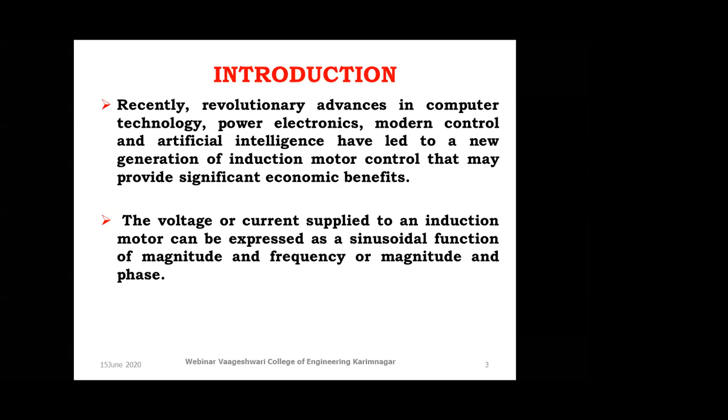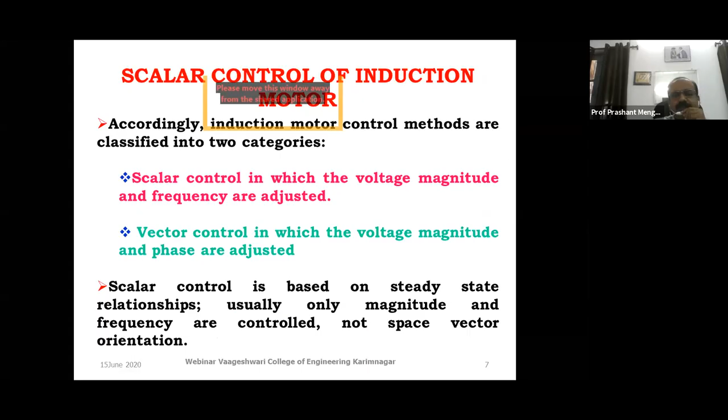So according to the induction motor control method, there are two categories. One is scalar control, in which the voltage magnitude and frequency are adjusted. Another is vector control, in which the voltage magnitude and phase are adjusted. Scalar control is based on the steady state relationship between voltage and frequency, and we are not controlling any space oriented vector controls.

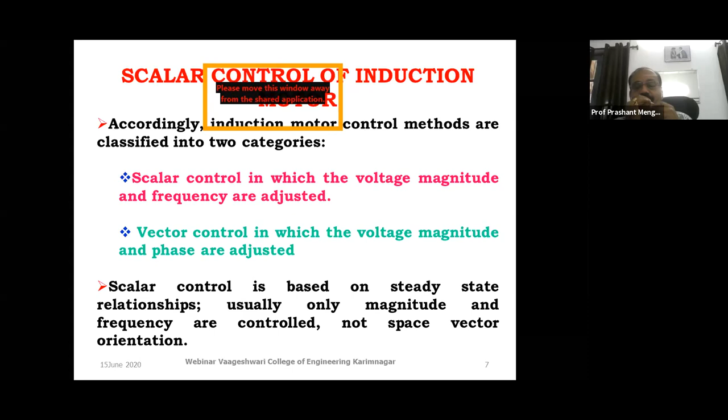Scalar control can generally be used in the open loop mode, whereas vector control is expensive and a high performance drive which aims to control the magnitude as well as phase of the voltage and current. As you are aware, cost economics is very important as far as induction motor drives are concerned.

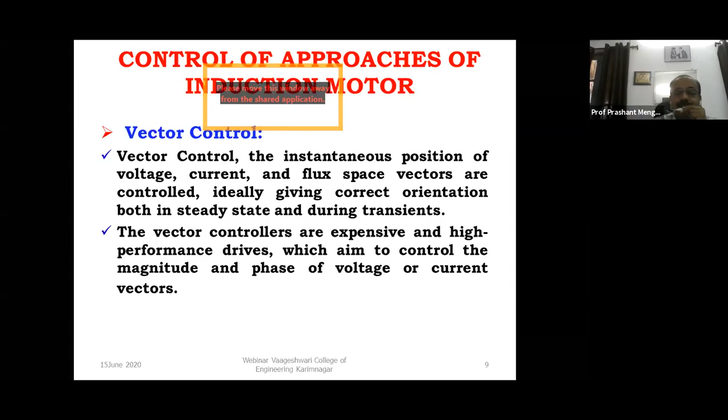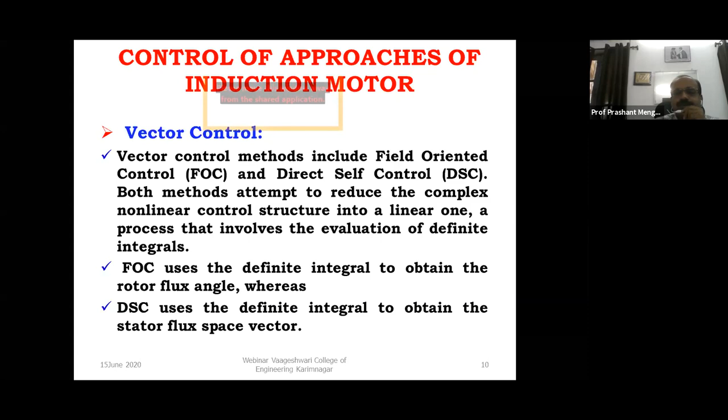So the vector control method includes field oriented control and direct self control. Both methods try to reduce the complex nonlinear control structure into a linear one, and the process involves evaluation of definite integrals. FOC, field oriented control, uses the definite integral to obtain the rotor flux angle, whereas DSC uses the definite integral to obtain the stator flux vectors.

Vector control has been successfully used in most applications nowadays; even drives with vector control are coming into the industries.

But there are certain disadvantages of vector control, such as sensitivity to parameter variation. Because if your load is varying, your induction motor parameters are varying, so there will be sensitivity, and it is prone to errors that may affect the operation of the induction motor.

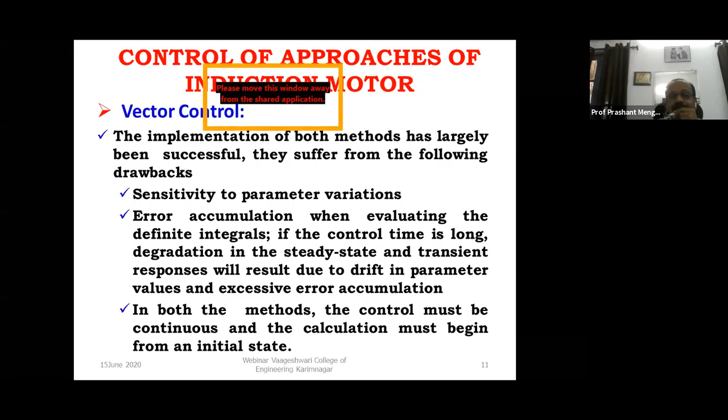Next is error accumulation when evaluating the definite integral, and as the error increases, it will affect the speed control of the induction motor. In both methods, the control must be continuous, and calculation will begin with the initial state.

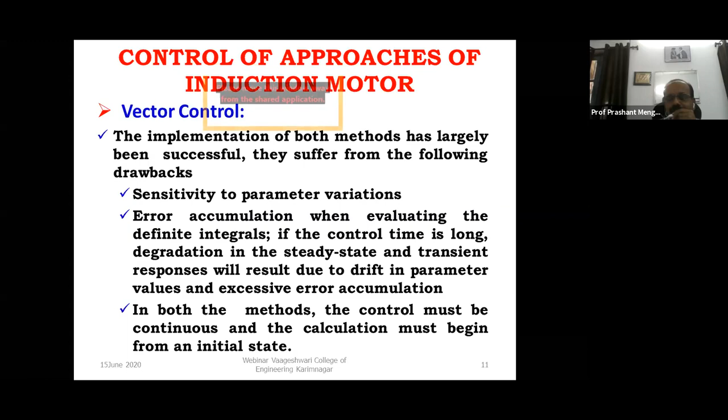Next is direct torque control. DTC also exploits vector relations but replaces the coordinate transformation concept of standard vector control with a form of bang-bang action, dispensing with PWM control, that is pulse width modulation, which is the conventional control we have been using for so many years.

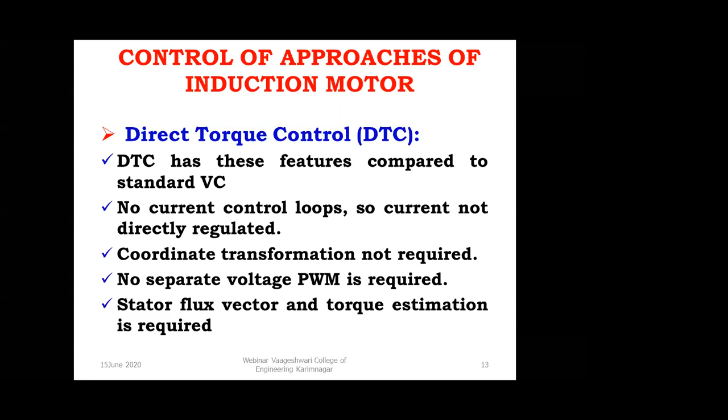DTC has the following features compared to standard VC: no current control loop, so current is not directly regulated; coordinate transformation not required; no separate voltage PWM required; stator flux vector and torque estimation is required.

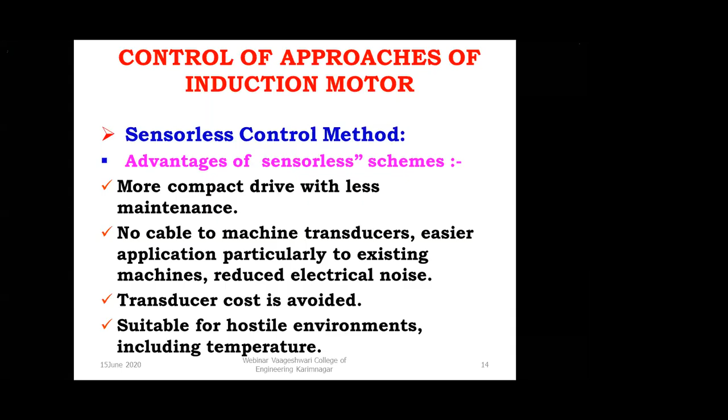Next is sensorless control. This is the advanced version, made possible due to development of power semiconductor devices, sensor technology, MEMS, and nowadays AI controllers and IoT devices. We can go for sensorless control of induction motors.

And research is, if you want to teach the student or tell the student how an induction motor is functioning, because now the lockdown is going on, most of the people will not go to the labs. So in that case, how do they study how my torque speed characteristic changes with the help of my inputs, with the help of my other parameters? If I change the parameters, how my induction motor speed is changing, my response is changing, which controller I have

to design for that. Because nowadays it is highly impossible during the lockdown, you cannot take them to the labs. So my ultimate aim is speed control of induction motor using the artificial intelligence technique. We already know, we are applying it in the labs also. We are performing the induction motor control using the stator control, then V by F control, a lot of things.

Next, most of the people, in practical, we are not carrying out the static and dynamic analysis of induction motor, just like time domain analysis and frequency domain analysis. We are not carrying it out. But as a teacher or as a researcher, you have to think over it. What are the parameters which help? And that you have to pass on to the student also, how to go for the analytics.

So your ultimate aim is to improve the transient and steady state response of the induction motor drives, using conventional control and artificial intelligence. And then if you want to implement it in hardware, you can go for the real-time control of induction motor drives. So scalar control of induction motor: why am I going for scalar control? Because a lot of research has already gone on in direct torque control, vector control and all. But till now, there is no ultimate solution to replace the scalar control in the industry.

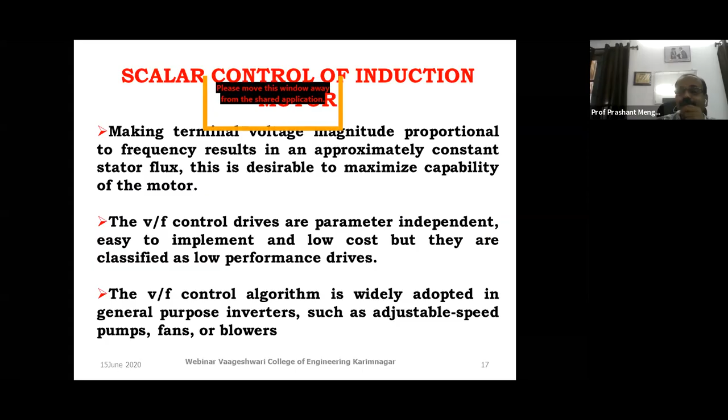Because in our day-to-day life, in domestic applications, in your homes, we are using the Tullu pumps for pumping the water and all. So all this is using scalar controls. So generally we are using voltage controls. Making terminal voltage proportional to the frequency results in an approximately constant stator flux. Because in case of induction motor, to avoid magnetic saturation, we have to maintain your V by F constant. You have to maintain some ratio so that the motor does not go to saturation limits.

So V by F control drives are parameter independent, easy to implement and low cost, but they are classified as low performance because V by F control is a conventional control, and their performance is low. Though it is low cost, the performance is low. But how to improve the performance by using AI control? That I am going to discuss now.

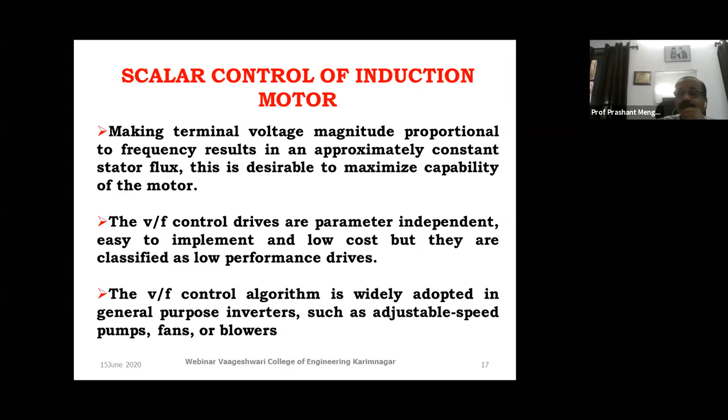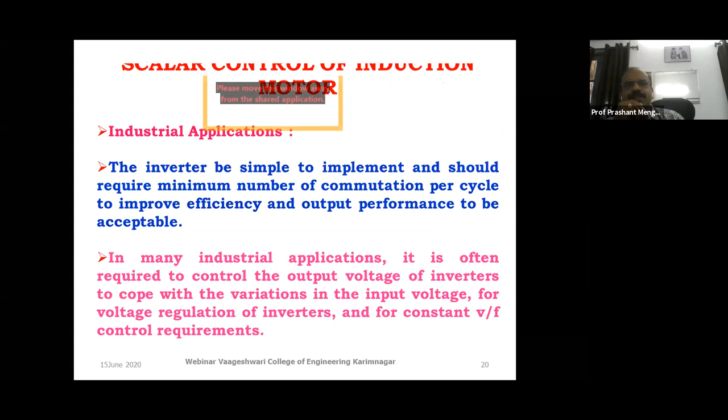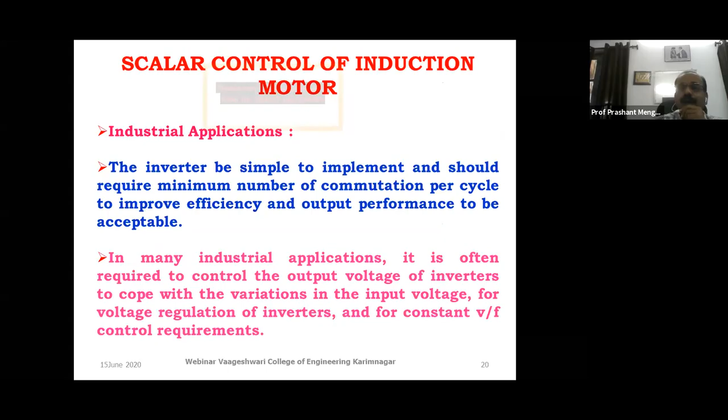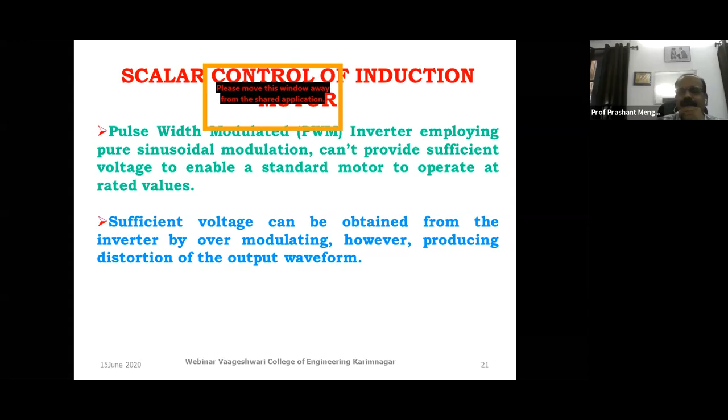In many industrial applications, it is often required to control the output of the voltage inverter to cope with the variation of the input, for voltage regulation and to reduce the harmonics in the output. This is the ultimate aim. So we always go for PWM, but nowadays sufficient voltage cannot be obtained from the inverter by PWM. So we have to go for over modulation instead of under modulation. So there is another option which is called space vector pulse width modulation. Everyone knows that.

But the very big advantage of space vector pulse width modulation is that it gives 15% more output voltage than the conventional modulation. That is, better DC link voltage utilization and more efficient use of the DC supply voltage. This is the very big advantage of space vector pulse width modulation.

Now, for analysis purposes, I'm going theoretically, I'm not going to the lab. That's why, in the last sentence of my presentation, I told you I want to correlate your practical labs with the laptops or the computer labs. How you are replacing your practical labs with computers. How you are coming from your conventional lab to the classroom. And how you teach them how the induction motor works, how it behaves.

And for that, first you have to carry out the dynamic modeling and simulation with the help of MATLAB. It can be expressed by the voltage and torque equations, which are time varying. And we are converting the three-phase motor into the two-phase DQ model. Those who have done their post-graduation and those carrying out research might have come across these things.

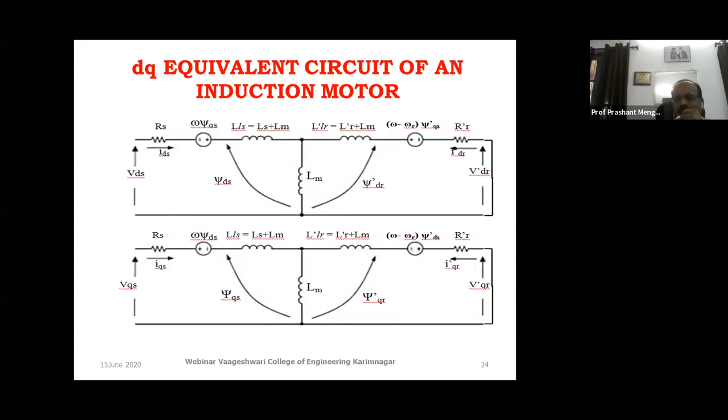And according to that, I have used the basic DQ model, which converts the three-phase induction motor into the two-phase induction motor, that is the DQ model. And I have written the first equation. I start with the flux, because from the DQ model, flux linkages can be achieved, which will be stator flux and rotor flux of the Q axis and D axis.

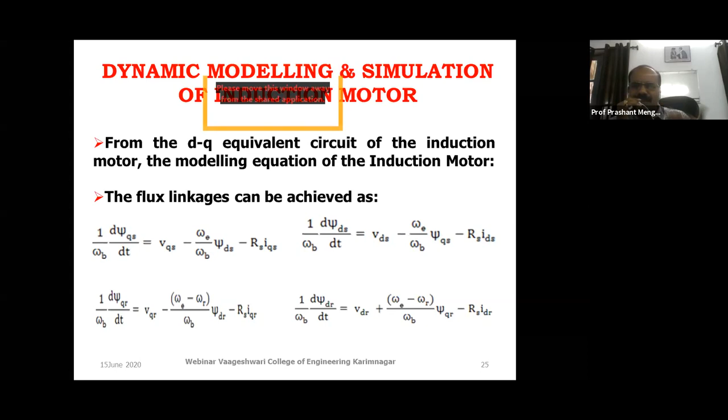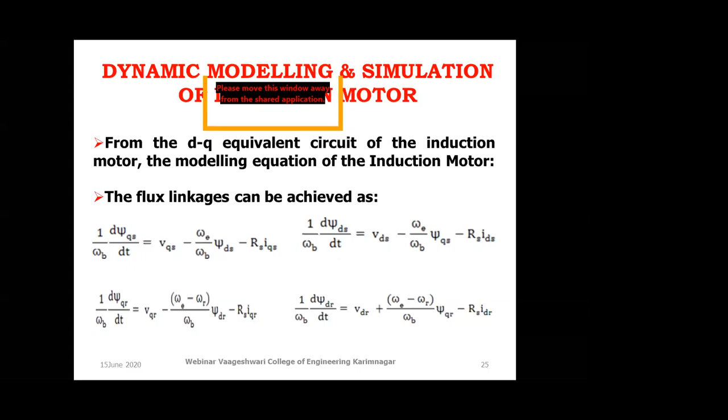For more detail, you can look in any books. You just go through it. A lot of books and a lot of papers are available. My papers are also available, you can just go through them. And these are the flux linkages for the rotor and stator in the Q and D axis.

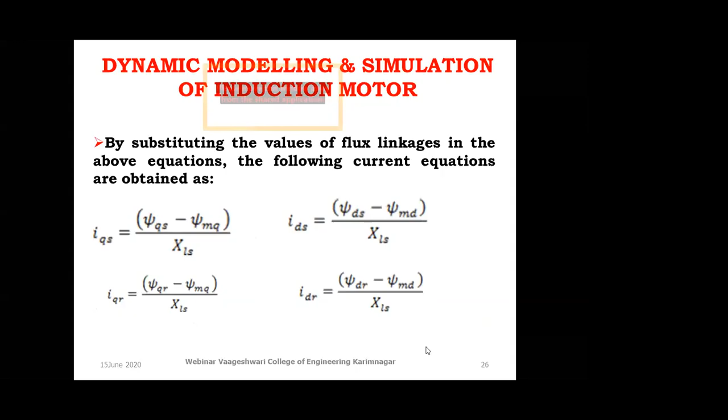So by substituting the values of the flux linkages in the above equation, we get the following current equations. I am calculating current now, because for the calculation of torque, current is required. So that's why I am calculating the D-axis current and Q-axis current for the rotor as well as stator in terms of the fluxes, which I calculated in the previous slides.

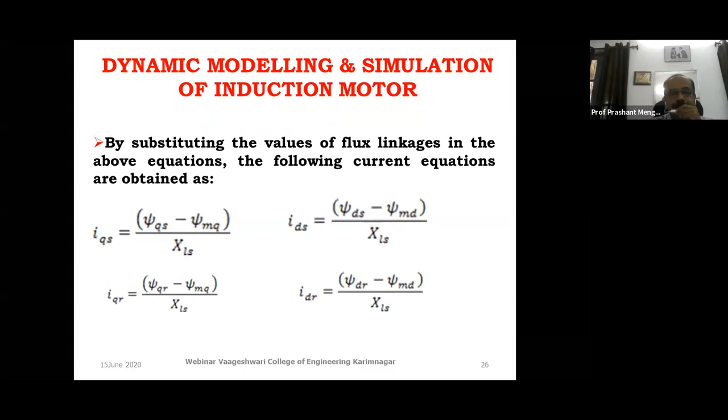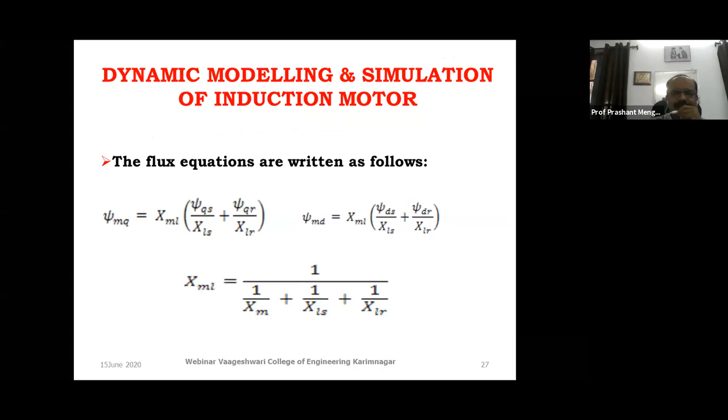So now the flux equations are as follows. Now I am getting the flux equations in terms of the reactance, Q-axis and D-axis, and inductances. So finally my aim is to calculate the torque by all these equations, because the induction motor converts electrical energy into mechanical energy. So the load is always connected mechanically.

After this, I transform this equation in MATLAB, because what I observe is that most people use the default model of MATLAB, that is the Simulink model and power system blockset, but that will not give you an accurate result, because if you want to use your model for specific applications or specific research, it is very, very important to use that model.

Use your basic equations, model those equations, and transform them into MATLAB instead of using the readily available MATLAB model, which will not be suitable for your further research or further analysis. So that's why I have used the basic blocks of Q-axis and D-axis. I will not go into much detail because of time limits.

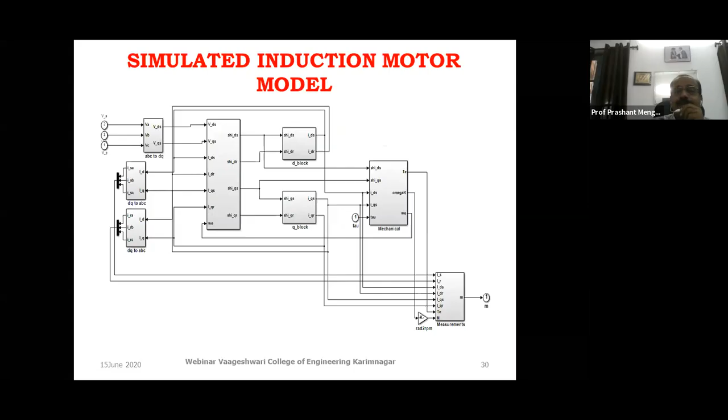Then finally I want a DQ model, because I have to transform my equations, that is the inverse DQ transformation, or Park's transformation as people say. I have carried that out, and then finally I am getting the measurements in terms of mechanical as well as electrical measurement. So now this model is constructed and I have to do the input source.

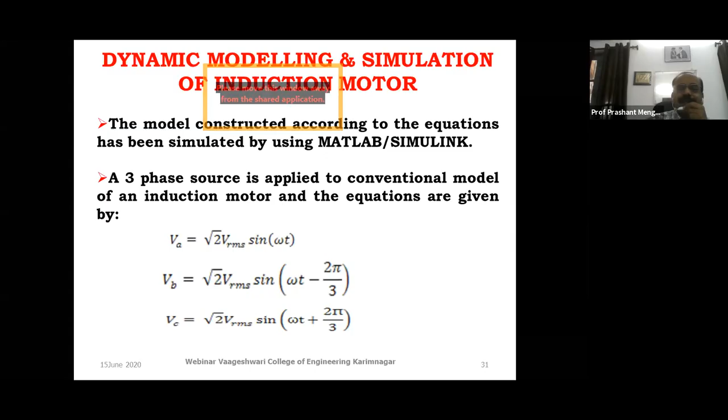So this is with the conventional approach, I have not used any controller. I have just modeled these equations from the basics, and then I have put them in MATLAB. Now for this conventional model, I am giving the input, that is 3 sinusoidal waveforms which are 120 degrees apart, as in the basic theory, that is the rotating magnetic field theory. I am applying my 3 voltage sources to the induction motor.

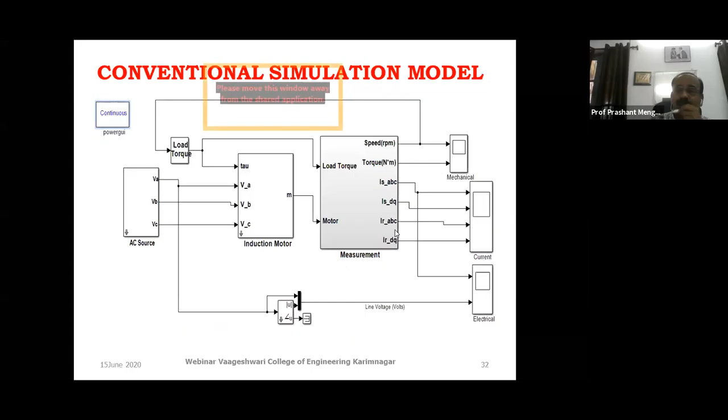And this is my model, the conventional model, with torques and load torques. I can apply the load torques also. In labs, you are applying them physically, but I am applying them in the simulation by using some commands or blocks, that is the load torque block. And the same thing I am using in the conventional model. This is the open loop control; I am not applying any closed loop models.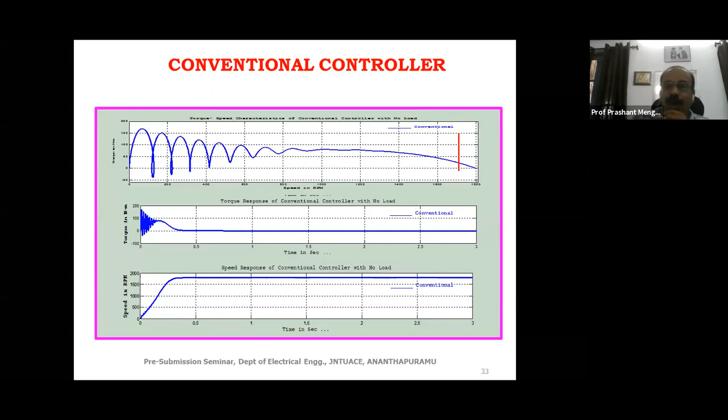Now, this is the open loop control. There are 2 types of control. Generally in the control system aspect, we always go for closed loop and open loop. By using the feedbacks, we always go for the closed loop, but we will study both. In control system you already studied that closed loop control gives more accurate results, and there is less oscillation and all. Now, when we apply the same thing to drives applications, whether it is proved or not, I will show you now. So this is my open loop control.

It is just my mechanical speed and slip speed, and with this I am getting the speed, and with this speed I am applying the voltage, and with the help of P, this frequency and omegas, my frequency is generated, and the V by F ratio is supplied to my space vector pulse width modulation simulation, and then finally it goes to the induction motor. All these parameters I have written. Most people know that, so I'll not go into much detail.

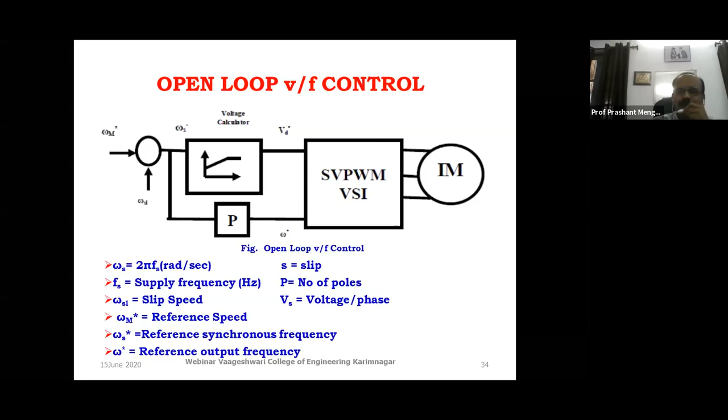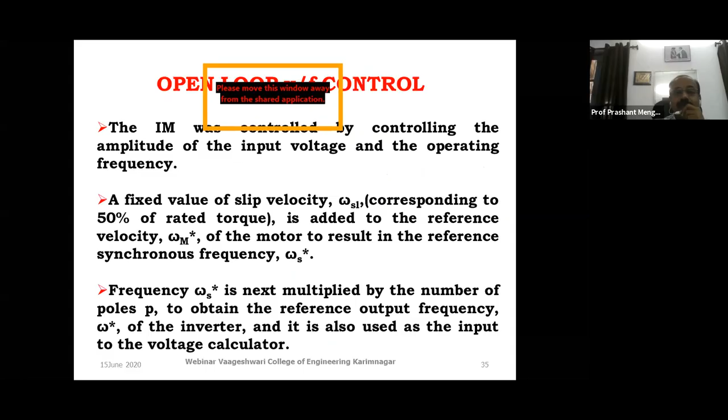And I have already told you the frequency is next multiplied by the number of poles to obtain the reference output frequency, which is supplied to the inverter for firing, to generate the pulses of the inverter, and then finally it goes to the induction motor, which sets what amount of voltage you are supplying, because it is V by F control again. So an advantage of open loop V by F control is the scalar control scheme.

The phase relationship between induction motor space vectors is not controlled during the transient. This is one of the advantages, because we are not considering any phase. The control scheme is based on the steady state characteristics, which allows the stabilization of the stator flux for different speed and torque values. In many industrial applications, there are requirements related to the dynamic properties of the drive, because we are not going for static analysis most of the time, because the motor is a dynamic drive. So we should know the dynamic properties, and how to control them.

So what are the disadvantages of open loop control? At low speed, the voltage drop across the stator resistance must be taken into account to maintain constant flux. Because if you do not take the stator resistance drop into account, the V by F ratio is not maintained constant. The disadvantage is that open loop will always suffer from oscillation. We already studied that in the control system also. Open loop control always has oscillation in the outputs.

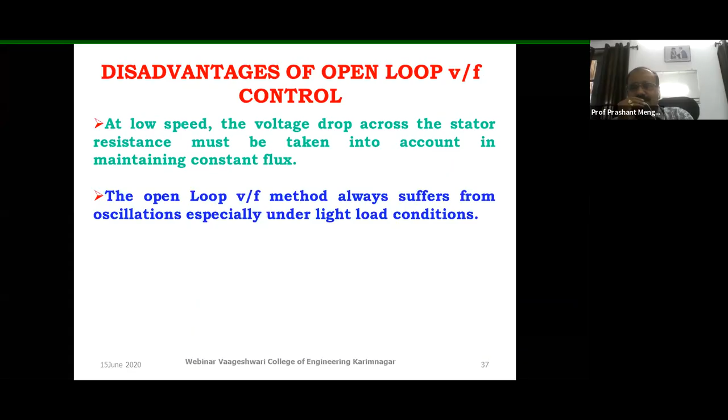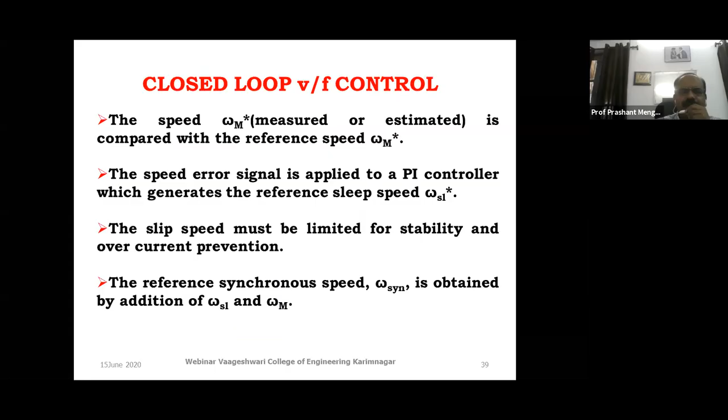So now we are going for the closed loop control. The same thing, but I have added that whatever output speed I am getting from the induction motor is fed back, and then I have put some controller, a PI controller, and the output of the PI controller will develop the frequency for the space vector modulation. That is the output frequency. Means I am controlling frequency as well as voltage by using the PI controller. So again, slip speed must be limited for stability and overcurrent prevention and all.

Now, AI based control of induction motor. What is AI based control? For the induction motor, a constant ratio of voltage magnitude and frequency has to be maintained. As I told you, in V by F control the V by F ratio should be maintained. This keeps constant and optimal flux in the machine. The V by F control calculates the reference stator voltage based on the V by F information.

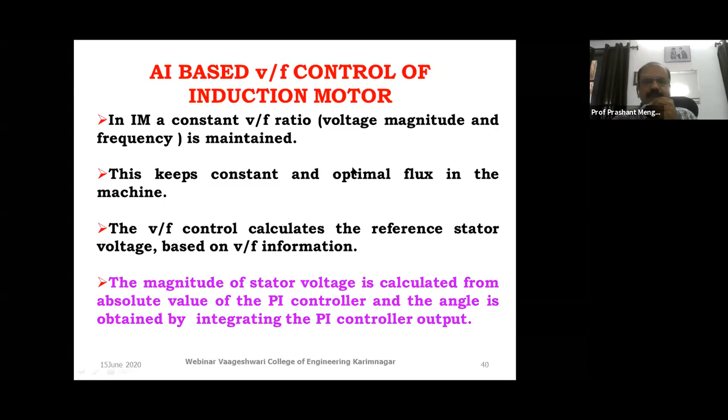The magnitude of stator voltage is calculated from the absolute value of PI control and the angle is obtained by integrating the PI controller. So the very first controller I am going with is the PI controller. That is a basic controller.

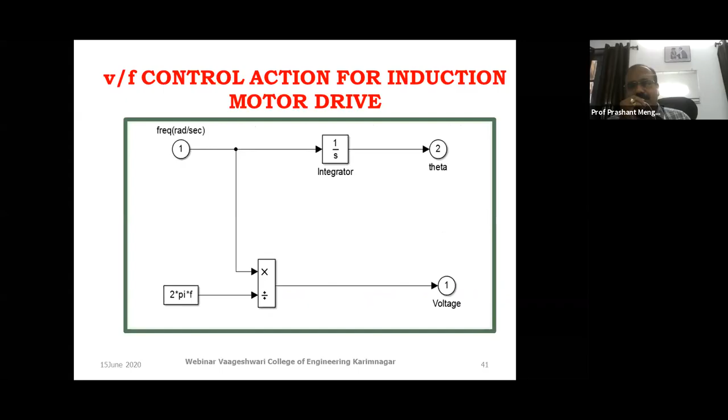Also, in most of the industries we are using the PI controller, not going for AI and all, because of its inherent advantages. There are a lot of inherent advantages for the PI controller. So that is the frequency, as well as one is the generated voltage and another is angle theta.

So, conventional control of induction motors. Scalar control methods are widely used due to simple structure, characterized by low steady state error. The PI controller is one of the conventional controllers and it has been widely used for the speed control of induction motors. So the proportional integral controller is a very common controller which is used nowadays also in industry.

It is not replaced; in addition to the PI control, we are adding some other control, that is artificial intelligence control, vector control or DTC, all these controllers we are adding additionally. So, advantages of the PI controller. PI controllers are very much suited to the parameter variations inherent in real-time plant operation. The major feature of the PI controller is its ability to maintain a zero steady state error to a step change in the reference.

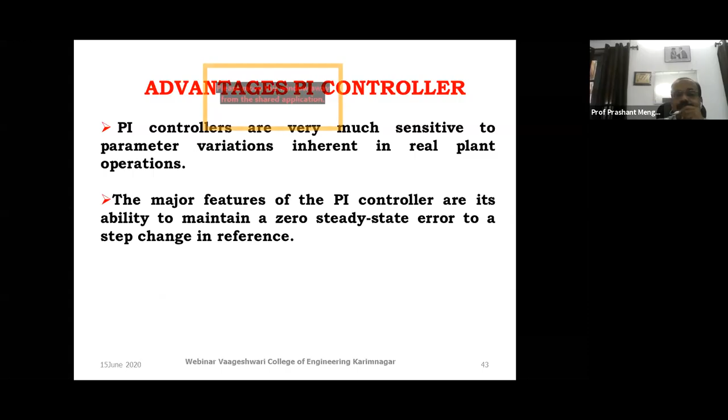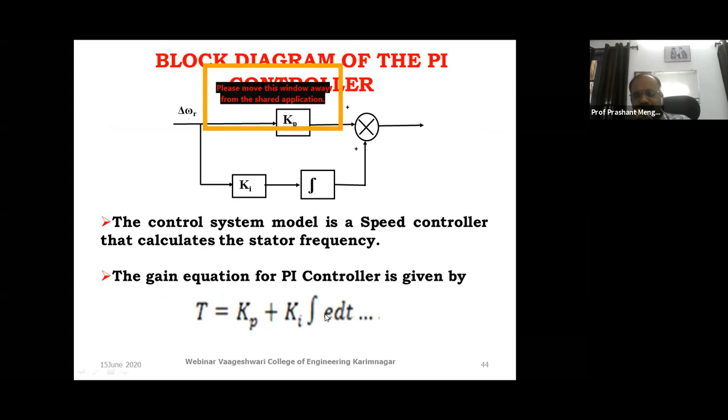This is my basic block diagram. There is the KP, that is proportional gain, and this is the KI, that is integral gain, and the control law is KP plus KI times the integral of the error, and this is the controller I have applied in MATLAB.

But there are certain disadvantages of PI controllers also, namely undesirable speed overshoot and sluggish response, because if you operate it after some time, it gives a sluggish response. Even though you are changing the voltage, your speed is not changing. Sudden changes in the load torque, and the sensitivity of control gain depends on Ki and Kp, that is the integral gain as well as proportional gain.

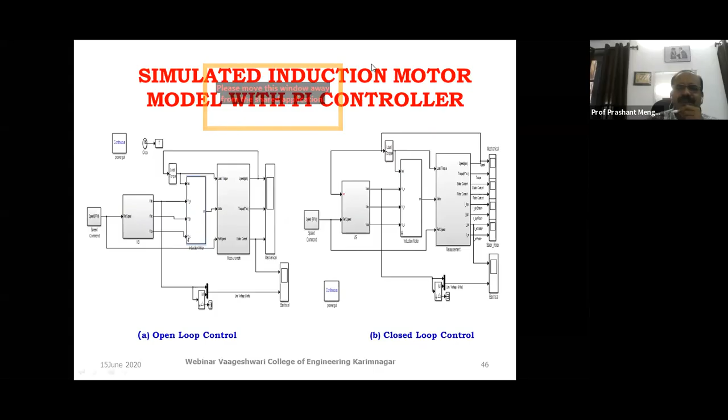So this is my simulated model of the induction motor with the PI controller in open loop mode and closed loop mode. So now, the need for the artificial intelligence controller. The PI controller suffers from poor performance whenever the plant is subjected to some kind of disturbances or the plant has a higher order non-linear structure, because every plant is non-linear in practical applications, and that's why the PI controller gives poor performance.

So what are the challenges in employing the PI controller? Two tuning parameters interact with each other, and their influence must be balanced by the designer, because tuning is the biggest problem in the PI controller. If you increase more, the oscillations or rolling behavior means your transient response will suffer; steady state will improve, but transient will suffer. And that's why the question comes, we have to go for the AI controller.

During the operation, even when the parameters and load of the motor vary, a desirable control performance is needed in both transient and steady state. We have to control transient as well as steady state performance of the induction motor. A controller with fixed parameters, like a PI controller, cannot realistically provide high gain. Therefore, the control strategy must be robust and adaptive. So the tuning becomes a challenging problem in conventional PI design. All these problems can be overcome by use of AI control.

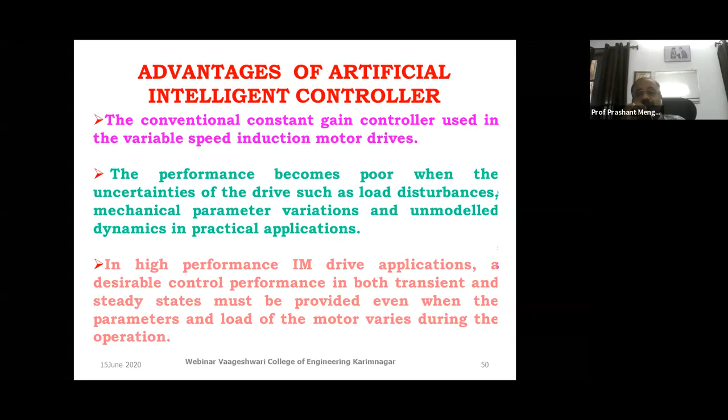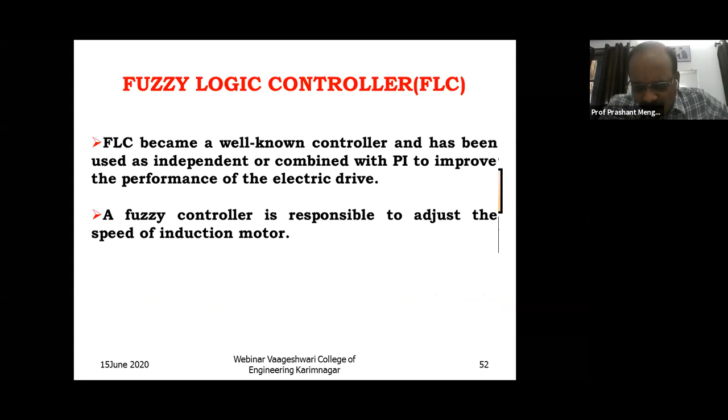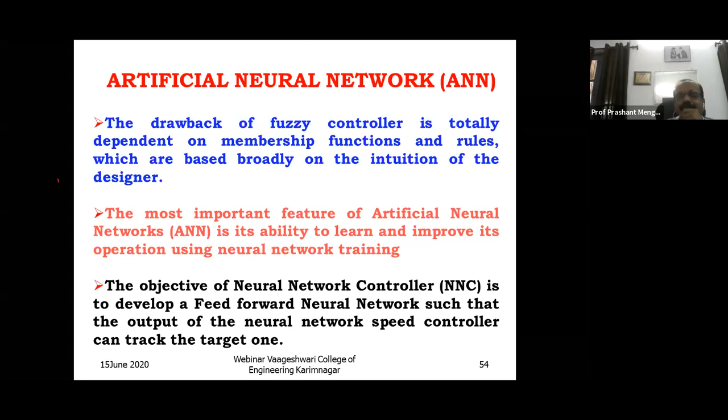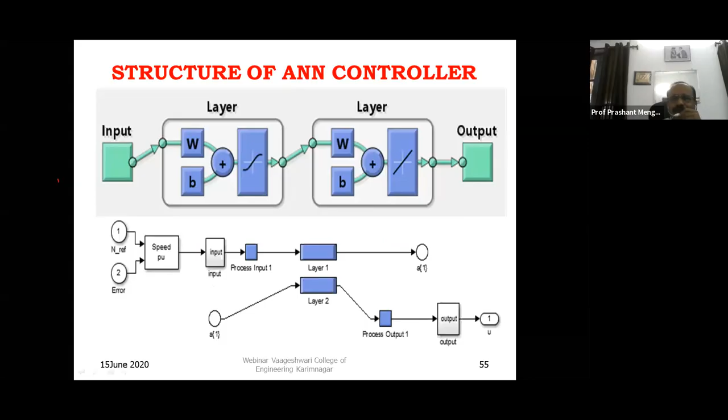So you can use a basic controller, that is the neural network, a feed forward network, such that the output of the neural network speed controller can track your target speed. I have assumed a two-layer network, that is, two layers with one hidden layer. And I have designed it with the help of the simple neural network toolbox. You can go into MATLAB and design it very easily.

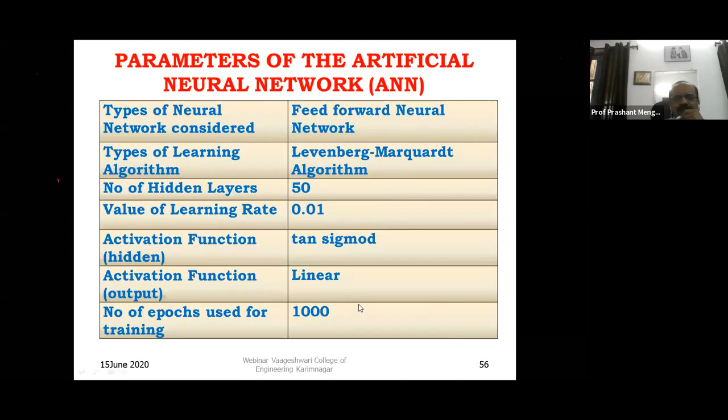These are the parameters I have used. That is the feed forward neural network. Then 50 hidden layers I have used. The learning rate, epochs, and epochs I have used 1000, and I have trained the network with 1 lakh samples. So, drawbacks of the AI controllers compared with ANFIS.

Now, all these controllers I have studied. First I told you about PI. It has its own disadvantages and its own advantages. FLC also has its own disadvantages and advantages. Then ANN also has some advantages and disadvantages. So for that advantage, I am going for the adaptive neuro fuzzy controller.

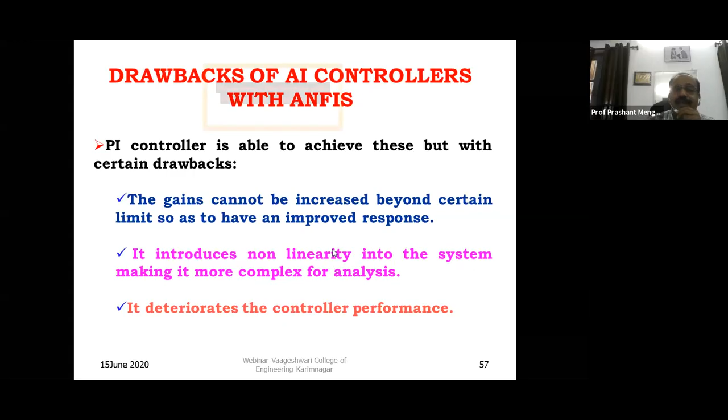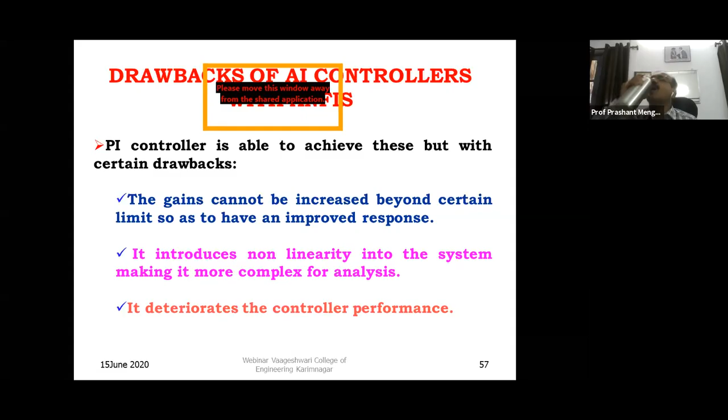So the PI controller is able to achieve this, but the gain cannot be increased beyond certain limits. In a PI controller, we cannot increase the proportional gain as well as the integral gain beyond certain limits to improve the performance. Non-linearity makes it complex for analysis, and it deteriorates the controller performance also. So these are the disadvantages of the PI controller.

Now, FLC has the following drawbacks also. In controller design, fuzzy logic works either independently or hybrid with the PI. The main design problem lies with the determination of a consistent and complete rule set and the shape of the membership functions. It also depends on the intuition and expertise of the designer. A lot of trial and error has to be carried out to obtain the desired response, which is time consuming.

Now ANN. ANN alone is insufficient if the training data are not enough. The basic fundamental problem with the neural network is, if you don't have real or proper training data, your neural network will not give good results for all operating modes. So the drawbacks of fuzzy logic and artificial neural networks can be overcome by using the adaptive neuro fuzzy inference system, that is called ANFIS.

The main concept of neuro fuzzy networks is derived from the human learning process, with the initial knowledge of the function as fuzzy rules, and it combines the learning power of the neural network with the knowledge representation of fuzzy logic. It's a combination of fuzzy and neural. A neuro fuzzy system means a fuzzy system which is trained by a learning algorithm, meaning I take the advantages of the neural network, that is training data, and the advantages of fuzzy, and combine both to form my ANFIS.

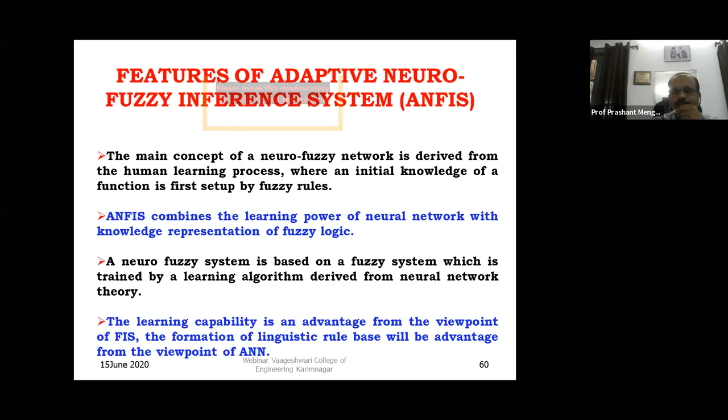The learning capability is advantageous from the viewpoint of FIS. The formation of a linguistic rule base is advantageous from the viewpoint of ANN. And that gives me a good result among all my artificial intelligence controllers. Now you can go for optimization with the help of genetic algorithms also. I've done it, but I will not show it today because it is time consuming.

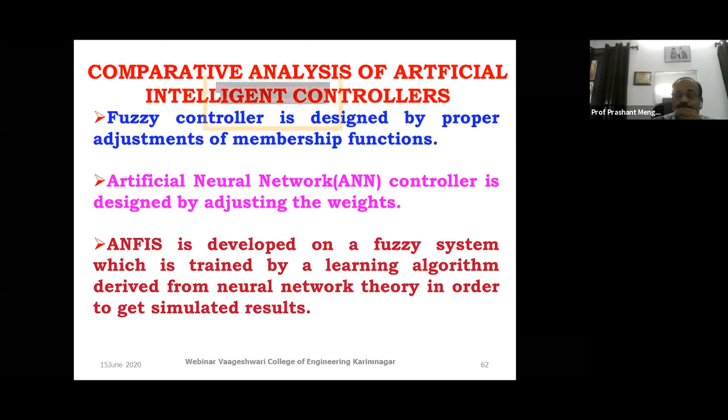The fuzzy controller can be designed by proper adjustment of the membership functions. And the artificial neural network controller is designed by adjusting the weights, because those are the important parameters in the case of an ANN controller. And ANFIS is developed on a fuzzy system, which is trained by a learning algorithm derived from neural network theory, in order to get the simulated results.

These are the parameters. So I have used a three-phase induction motor, 1 HP, 415 V. I have simulated higher rating induction motors also, that is 20 to 50. Because of the time limit, I cannot show those results.

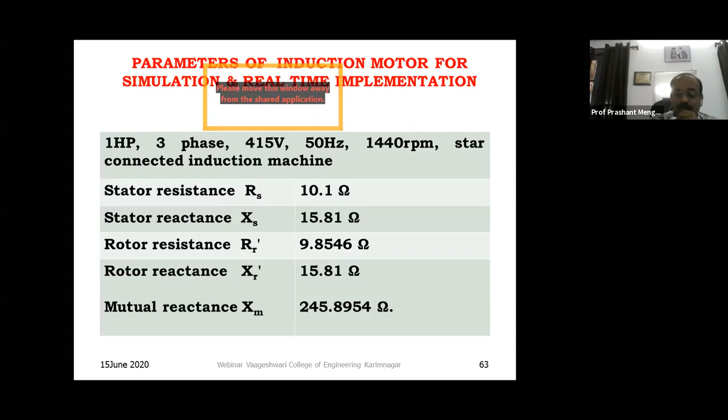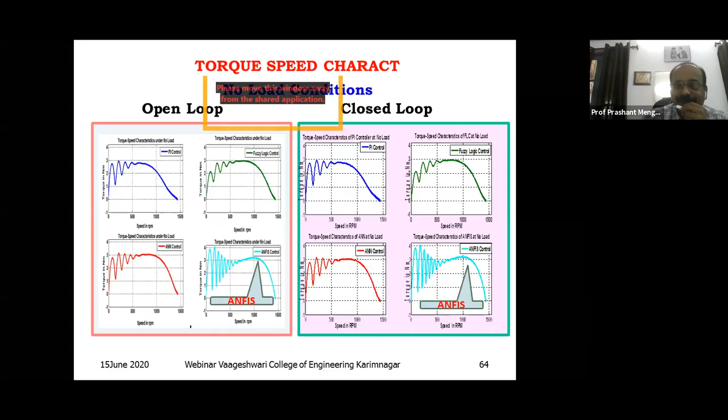You see that you are getting good torque in the case of ANFIS, and you are not getting good torque with the other controllers. Look at PI, look at fuzzy, and look at ANN. There is a lot of difference, but with ANFIS you are getting good torque initially, so the motor can start very quickly. It reaches its steady state value faster. That is the ultimate aim of any drive system.

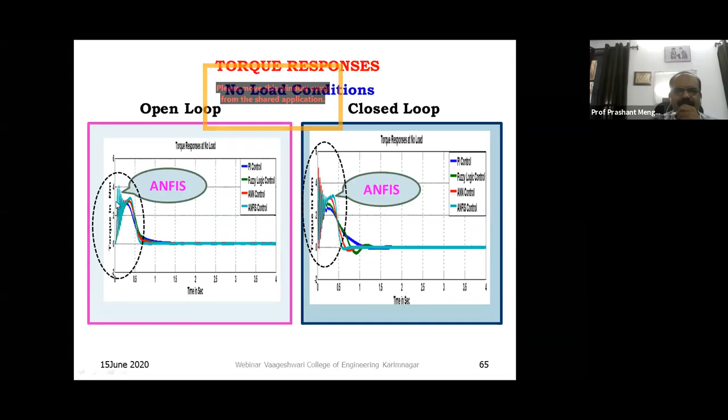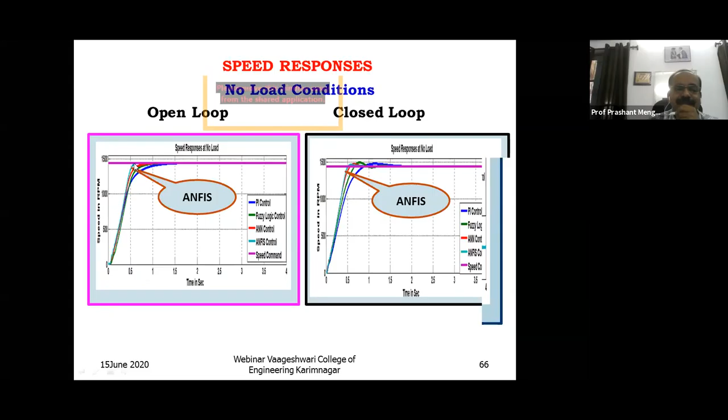So this is again for the no load, this is my torque response. You can see the torques. Initial torque is more here, both in open loop and closed loop. First is torque speed, second is torque response, third is speed response. You see it reaches steady state value faster compared to the other three controllers.

Now this is my first condition, the no load condition. I have used the no load condition. Next, if I apply the load, what are my parameters?

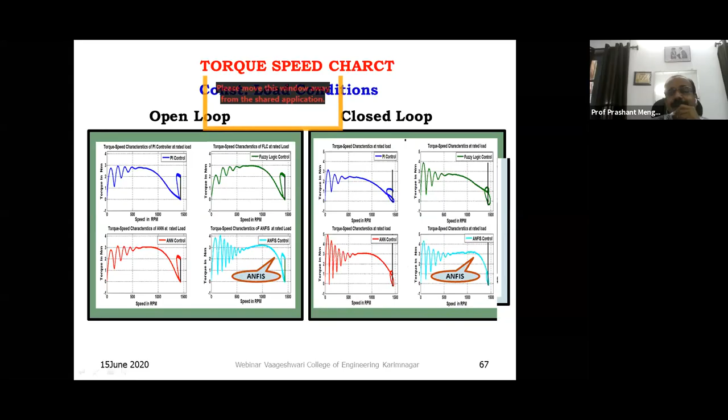You see that if I apply a constant load to the induction motor, even with application of the load, my ANFIS controller comes back very fast to its desired value. It will oscillate momentarily, but it will regain its original desired value. That is the ultimate aim of ANFIS.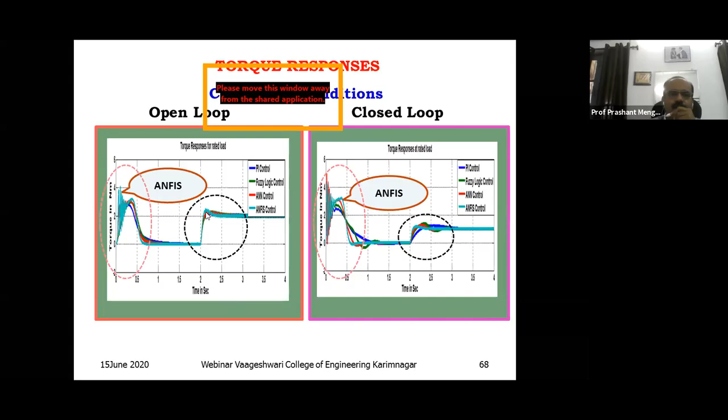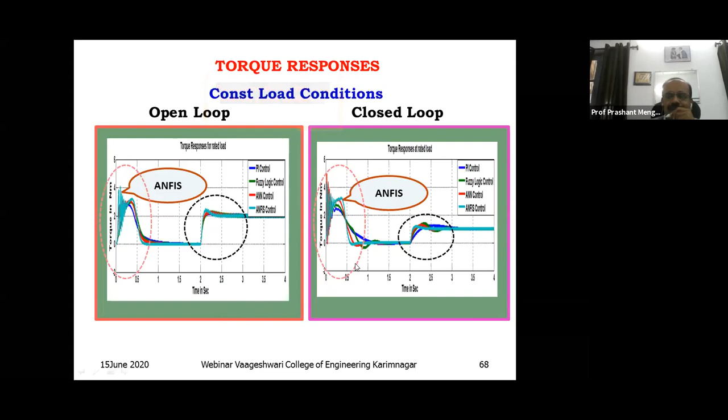Next you can see here, I am applying the load at 2 seconds. You can see it reaches oscillation, and in closed loop the torque is more and you are getting good results. Then for speed also, after applying the disturbance or constant torque, sudden application of the load, ANFIS gives good results. You can see that.

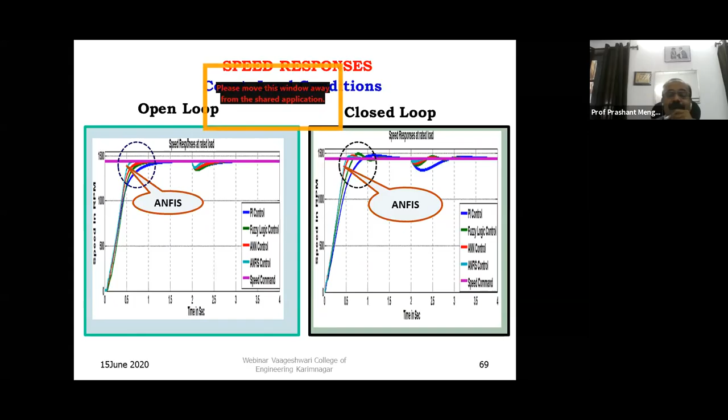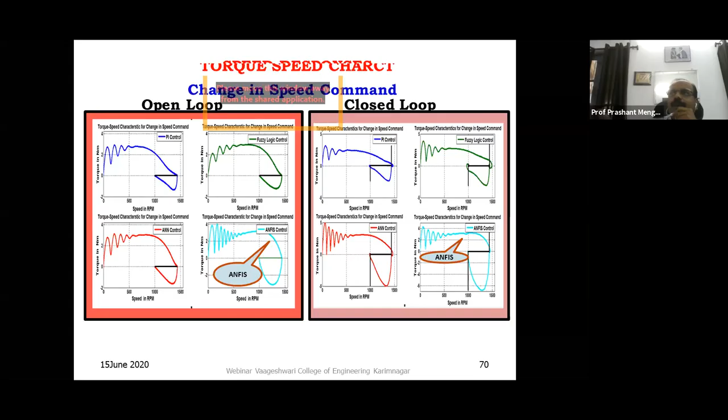Now third condition, I have used change of speed. Suddenly I change the speed command, because initially speed is 1500, then after certain time I want speed to be 1000. So I applied this, and it observes the changes and rapidly comes to its position. You can see that, you can observe that.

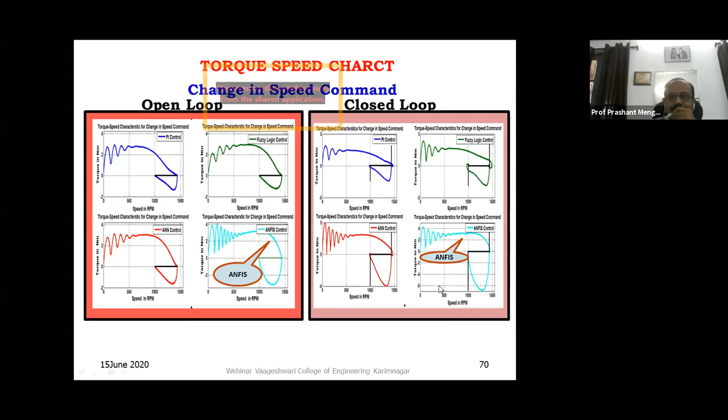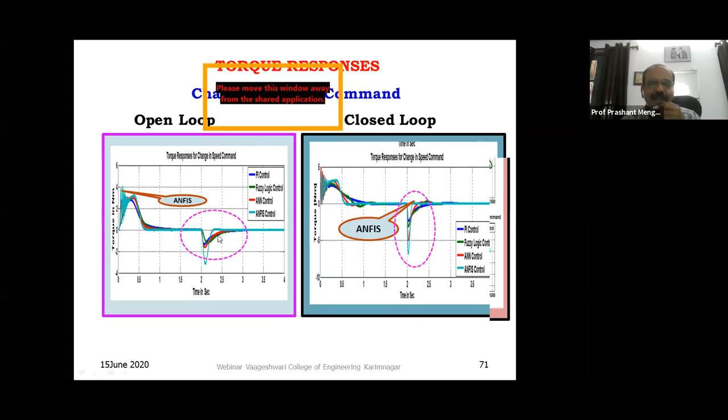And this is again torque characteristics. You can see there is a dip change, but it will gain immediately. You can see that neural and others take more time, but this takes very little time to reach their final values.

Similarly for speed, you can see by changing the speed suddenly, or suddenly changing the load, even though mechanical changes and parameter variation happen, ANFIS responds very fast. It gives a good result compared to other controllers.

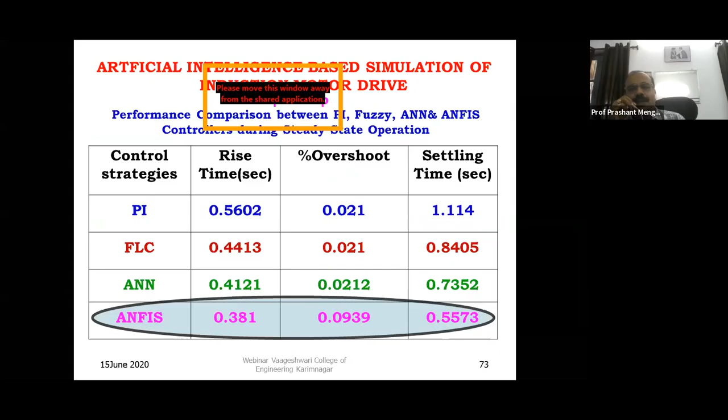And then I carry out the steady state analysis, that is the transient analysis of induction motor drives, and you will know which controller is the best suitable for your drive.

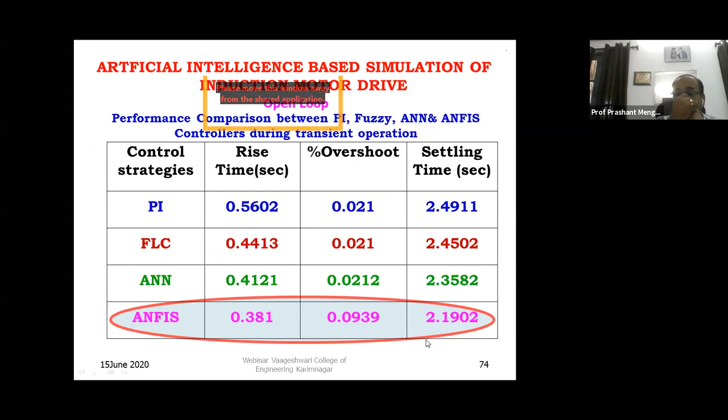Second thing, when I apply the load also, you can observe that ANFIS gives me good results. It reaches steady state value faster. Settling time is one of the criteria for transient domain.

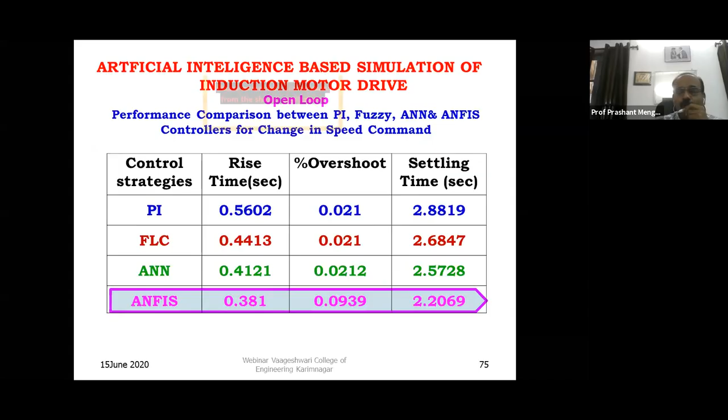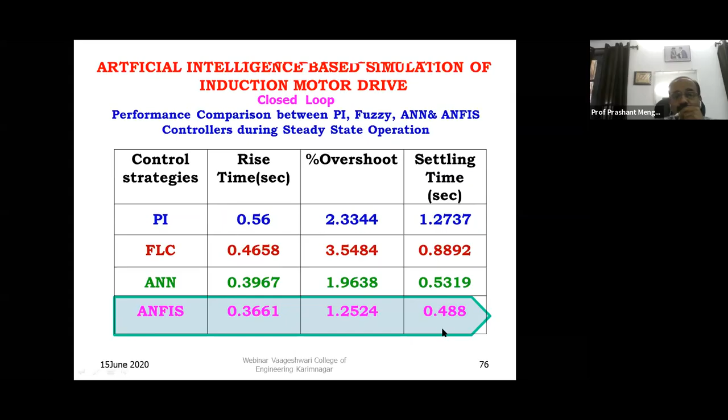Then if I change the speed also in open loop, I am getting good results. Next, in closed loop also, by default all controllers perform well. But among all controllers, ANFIS performs very well as per all parameters: peak overshoot, rise time, and settling times. You can observe that in all three conditions.

This is the last condition. Now, if you want to show the student how the motor can work as an induction generator, because recently there are a lot of applications increasing the importance of distributed energy resources for wind turbines and micro turbines, there is renewed attention to the induction generator.

And this last is the way ahead. So what you can do going ahead: the demand for high performance induction motor drives is rapidly increasing, particularly in the area of traction, electric vehicles, oil drilling machines, aerospace.

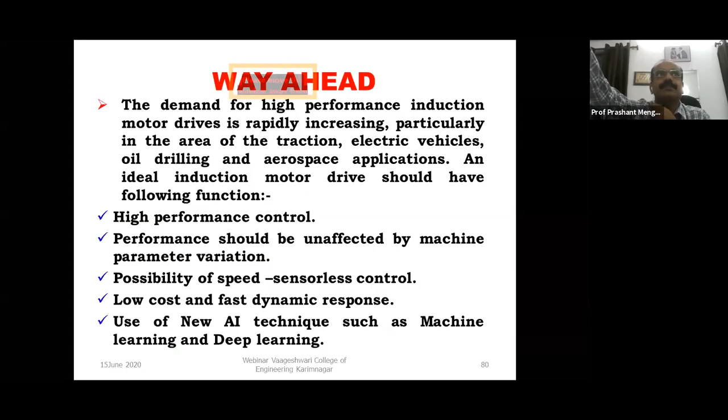So induction motor drives, particularly in the area of traction, electric vehicle, oil drilling machine, aerospace applications, an ideal induction motor drive should have the following functions: the drive should have high performance control. Performance should be unaffected by the machine parameters. If the machine parameters or loads are varying, your drive should still be capable of giving a good desired output.

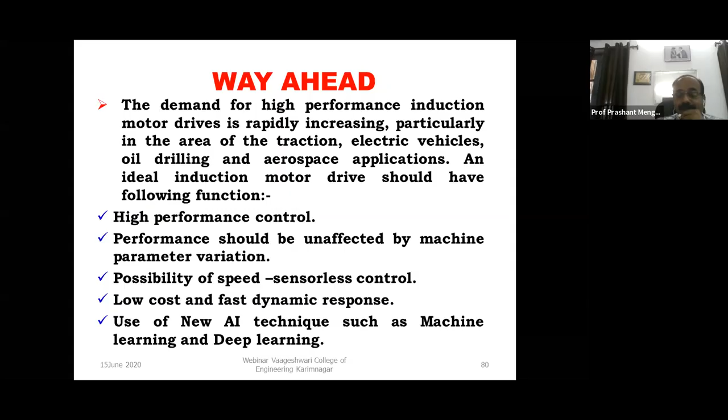Next is the possibility of sensorless speed control, low cost and fast dynamic response, and use of new AI techniques such as machine learning and deep learning. You can carry out your own research if someone is interested, and then go for deep learning. Thank you, this is my small presentation.